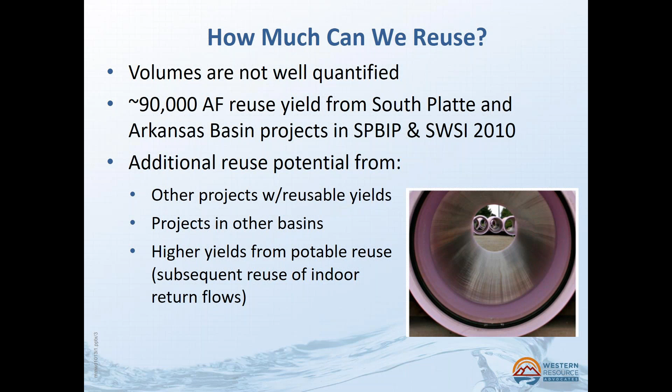And so I wanted to quickly define what we're talking about when we say reuse, because there are different definitions depending on what the context is. There's a lot of de facto reuse, we call it. That happens all the time when a community or an irrigator, their return flows get back to a stream and someone downstream picks them up and uses that.

But today what we're talking about is where one entity, usually a municipal water provider, reuses their own water supplies that are legally reusable, and they may use it themselves, or they may lease it or otherwise share it with someone else. If you think about the WISE project, for example, that's Aurora and Denver Water sharing their reusable supplies with South Metro communities.

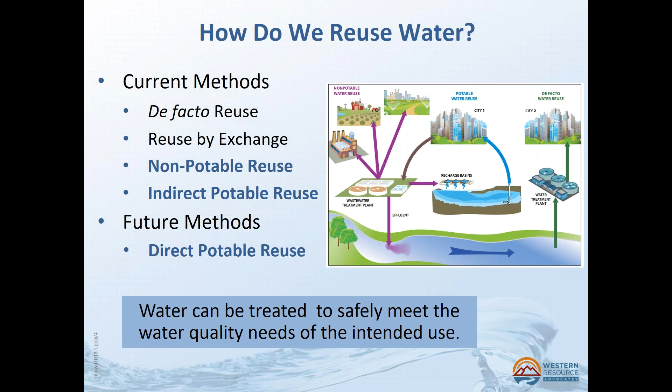And it's also upfront important to acknowledge that in Colorado, only certain types of water can legally be reused, so it isn't something that all communities can do. That said, many Front Range communities, where we're seeing a lot of Colorado's growth, do have at least some reusable supplies, and some communities have a lot of reusable supplies.

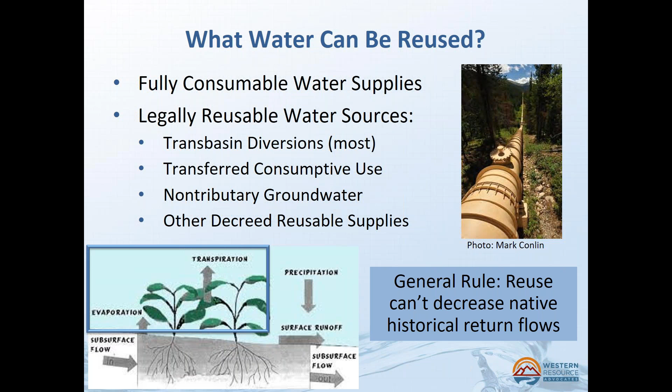And the general high-level rule when it comes to what water can legally be reused is that you can't decrease historical return flows from native supplies because someone downstream was depending on those. So that means the water that can be legally reused includes most, but not all, transbasin diversions, transferred consumptive use, non-tributary groundwater, and then also some of the more recent water decrees will have reuse specified in the decree, and so if that's the case, that water can also be reused.

And so we've been reusing water in Colorado since the 1950s. Most reuse projects in Colorado are non-potable. That means the recycled water isn't treated to drinking water standards. Most of that is currently used for outdoor irrigation. And if you think about that, that's a big limitation because it's limited seasonally. You can't do that all year round. And so that results in limited volumes of reuse.

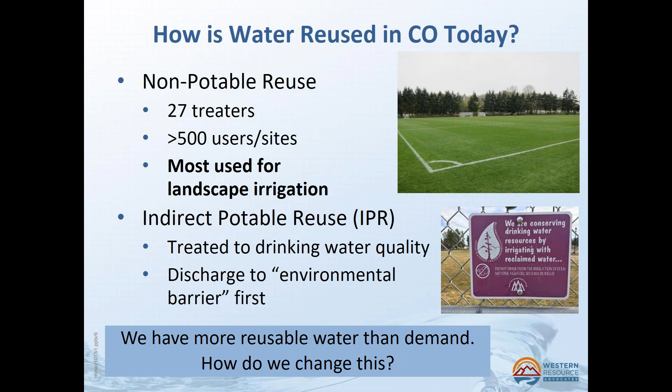We also do currently have what's called indirect potable reuse, and that's where water is released to what we call an environmental barrier, a stream or another water body, before it's recaptured, treated, and reused by an entity. And Aurora's Prairie Waters project is the most well-known, I believe, in our state. That project really was groundbreaking, and it has helped pave the way for other utilities to think seriously about potable reuse. So a big issue that we have is we have more reusable water supplies than we currently have demand for that water. So what can we be doing to change this?

So I'm going to break this into non-potable and potable. On the non-potable front, there's a lot of progress being made to increase the ways that we can use recycled water that's not treated to drinking water standards. Colorado's Water Quality Regulation 84 for reclaimed water specifies how non-potable water can be used. Right now in Colorado, there are 11 uses approved, and those include things like landscape irrigation, certain industrial and commercial uses, fire protection, non-food crop irrigation.

Last year was a big legislative session for reuse. There were several new uses that were legislated, and that's been followed up by, in 2018, a water quality rulemaking that added toilet and urinal flushing and also localized reuse systems, and I think Damian's going to talk more about that. And we're also currently in the midst of another water quality process that would add some other uses, and those are industrial hemp, commercial, and non-commercial food crops. So as we increase the ways that water can be recycled and reused, hopefully there's going to be more demand for that water.

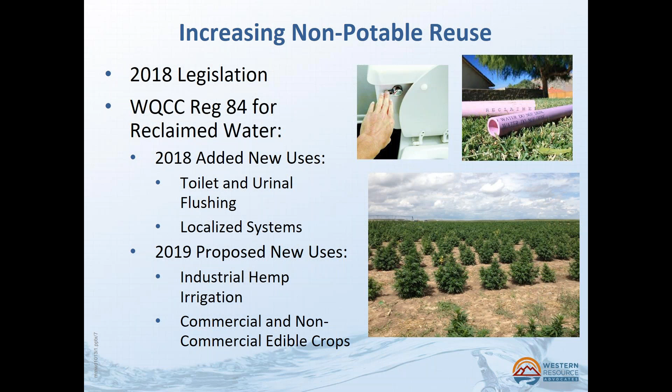At the same time, we also want to increase opportunities for potable reuse. So that's when we are now treating this recycled water to drinking water standards. And there are a lot of reasons that there is interest in that. I just put a few of the benefits down here, and I think Mark's going to talk about some of the drivers that are specific to Castle Rock. But a big one is increased yield. You can potentially almost meet double the demand with the same initial volume of water through potable reuse, because you can keep reusing those indoor return flows until they're fully consumed.

And another big benefit to potable versus non-potable reuse is you don't need a whole separate set of delivery infrastructure, which is really expensive to install and maintain. And it can also limit opportunities if a recycled non-potable system doesn't reach an area that you want to serve. With potable reuse, you're not limited to any specific use. You don't run into those seasonal limitations. The water is distributed through your existing system, so it can be used anytime, anywhere, for anything. And so these and some other benefits are what are driving utilities to take a serious look at potable reuse.

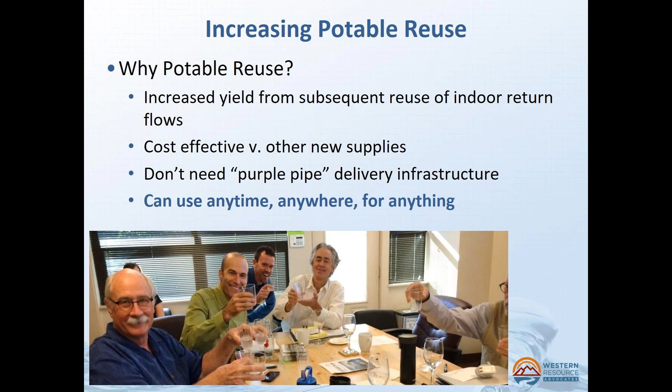So I already talked about Aurora's Prairie Waters. That's that indirect potable reuse where the water is first discharged to a stream. So communities can do that now. But what if a community wants to keep that water in their system? And there are some reasons to do that. If you think about once the water's discharged to a stream, if someone wants to capture it, that needs to be pumped back up. So that's a cost that could be avoided if you just keep it within your system.

And also, as water travels downstream, oftentimes there may be transit losses that accrue, so you're losing some of your supply. And then another reason is that some communities are really treating their effluent to a very high quality, and in some cases it can actually get degraded when it hits the stream, or that quality is not as consistent as it is coming out as effluent. So there are benefits to grabbing that water.

And these are just some of the things that are driving utility interest in direct potable reuse. And so that's where instead of discharging it to a stream, you just keep it in your system. The water's purified using multiple and advanced treatment processes. Often it's blended with other water supplies, and that results in a safe drinking water supply.

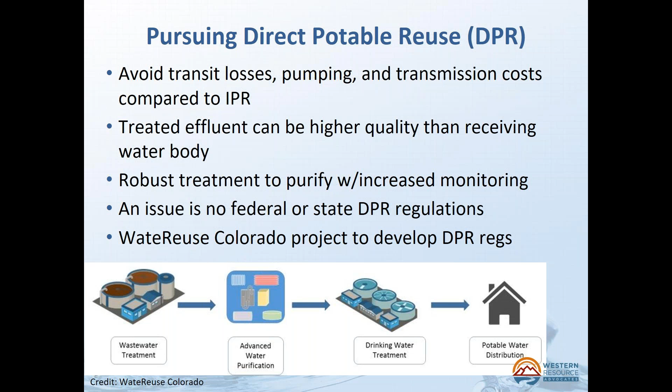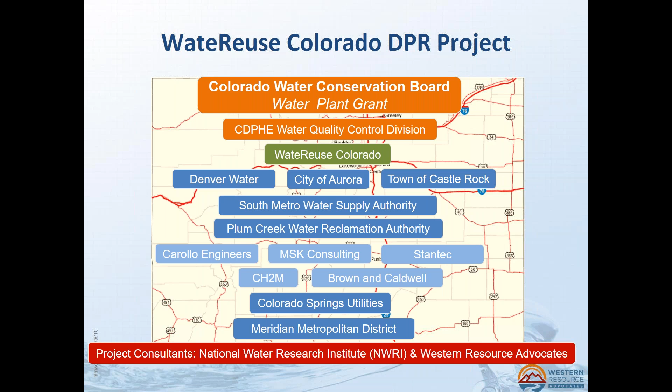And what Water Reuse Colorado is doing is they've hired the National Water Research Institute, and they run similar projects around the U.S. There is a panel of Colorado and national experts that have been hired, and they're working very closely with Colorado stakeholders and our state regulators to develop a proposed framework for DPR regulations. That project's ongoing. It should wrap up by the end of this year, and then we're hoping that we can kick off a rulemaking for those new regulations in 2020 or 2021.

And if implemented, that regulatory framework will provide water treaters with the certainty they need so that they can evaluate indirect potable reuse and direct potable reuse equally amongst other water supply options. One outstanding issue I want to identify is that for these rulemakings, and as reuse increases and there are more projects coming online, our state regulating agency, the Water Quality Control Division, is going to need more staff to regulate reuse. And so securing those resources is really going to be critical to Colorado's ability to increase reuse, and that is something that we need to be working on.

And so here's that headwaters issue again. As we work to increase reuse as one of the ways to ensure we have sufficient water supplies now and into the future, there is still a lot of work to be done, but we're definitely on the right track and we're making really good progress. One thing I just wanted to mention as I wrap up, and this is my last slide, is that we're seeing increased interest in and support of reuse, not just among water utilities, but also among the public. And that's really important because public acceptance can make or break a reuse project. And so everyone listening in today, hopefully you can help with that.

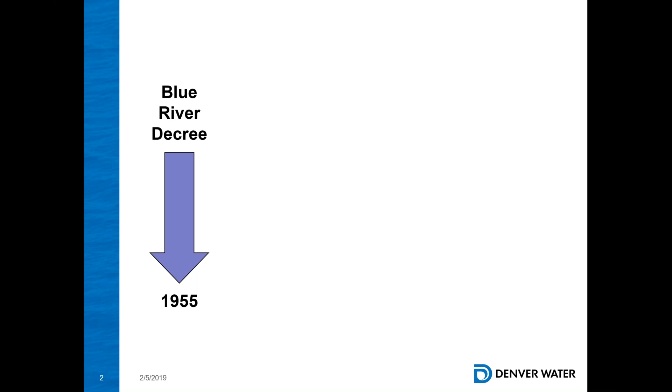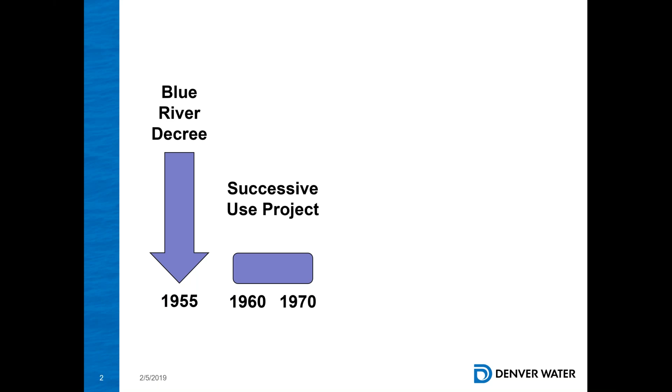So once you have that water supply and the right to that, we decided, okay, how can we use this? Are there technologies out there that are compatible with treated wastewater that we can make use of? So in the 60s and 70s, we took a look at those treatment technologies and found that there were quite a few that were compatible with treated wastewater. So the next step was to take a look at water quality we could produce. And in the 80s and 90s, we entered into the Potable Reuse demonstration project, where we took a number of these technologies that you'll find in potable reuse applications today in various combinations and produced water, and then ran some of that water through toxicology testing with lab rats and a whole host of water quality analyses. Really a landmark study that's cited even today.

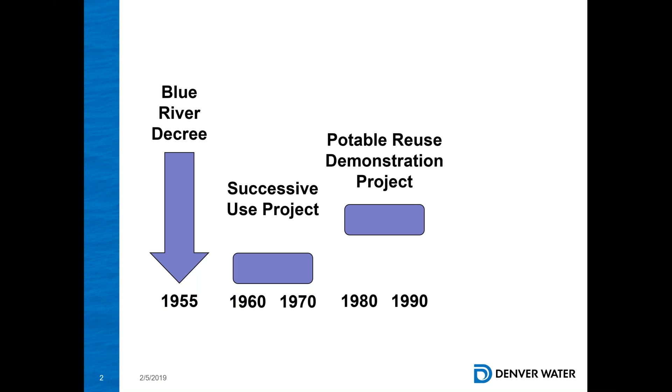And so while we found that you can take treated wastewater and treat it to virtually any water quality, including potable and beyond, the regulatory framework to provide some certainty was not there at that time. And then also the public. We didn't feel that the public was quite ready for this transition. And so rather than go down the potable reuse path, we decided to commission our non-potable recycling plant. That was in 2004. It's a 30 MGD plant that is expandable up to 45 MGD, uses some biologically active filtration and other interesting technologies to produce non-potable water.

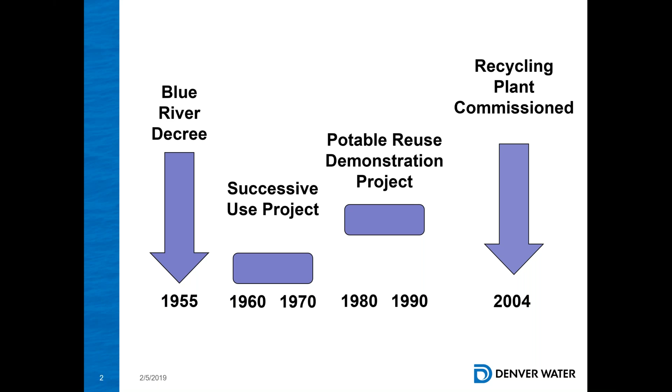So the water rights and agreements associated with that, both the Blue River Decree and subsequent agreements, are a big driver for reusing water, but it's hardly the only driver. Another huge driver is taking demands off the potable water system. You can stretch your potable water system and the supply further if you supply some of those demands through a non-potable system. The treatment, if you don't need to treat up to potable water standards, it costs more to do so. And so treating up to the water quality that's needed for the end use makes a lot of sense and can save money in chemicals and salt inputs into that system.

It's a reliable water supply. We actually have more trans-basin water, so more reusable supply during a drought year. We're actually bringing more water over the Continental Divide, and so there are some reliability benefits to that system. Nutrients, among other parameters, are actually beneficial to the end uses being served, while those same parameters can be pollutants when they're discharged to a water of the state. So you can utilize existing nutrients and reduce pollution to our waters with the same rock.

So when you compare a recycling system or a reuse system or a reclaimed water system, they all mean the same in the context here today. When you compare those types of systems to building a new dam or acquiring new water rights, it is comparable financially and otherwise, and so it does make a lot of sense as we're learning with a couple of the dams we've tried to build, whether it's Two Forks or Gross expansion. Those are difficult and costly, and so an alternative like this makes a lot of sense. It's also a lower cost to the users on the other end of it. They save about 75% of the costs associated with potable water, so it works for both parties.

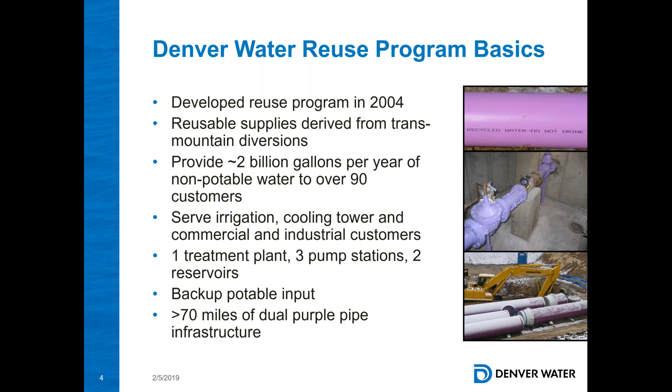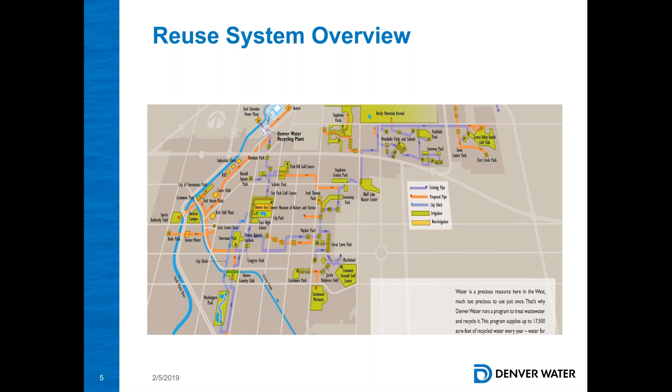So as you expand your infrastructure, that next incremental demand gets more and more expensive. And so it's important to identify the right customers, but we also want to identify additional uses that recycled water can be put towards. So the original Regulation 84, which is the state regulation that governs recycled water, reclaimed water as it's known in the regulation, came about in 2000, addressed basic irrigation.

In 2004, industrial and commercial uses were added to that. 2005, we expanded the irrigation to even include single-family homes. In 2013, laundries and car washes were added to the list of approved uses, and then last year toilet flushing was added to that list, and localized systems, which are smaller systems that take in wastewater from a campus or a district scale development and utilize it to produce reclaimed water for various uses.

But those smaller systems have just a little different operating paradigm and different requirements, whether it's design, the treatment employed, how it's operated, how it's monitored. All those are a little different. So we wanted to distinguish between classical centralized systems and these new localized systems that we're seeing implemented throughout the country and hopefully in Colorado soon.

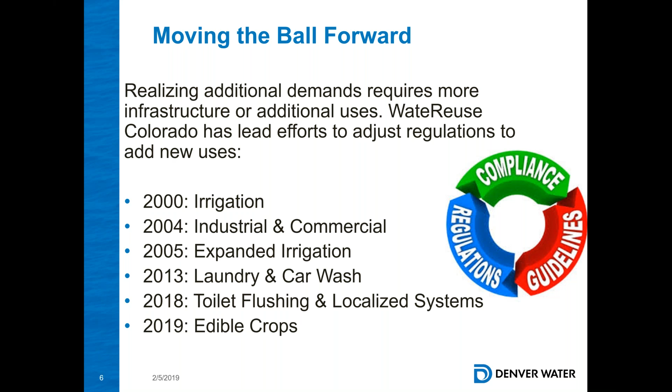This year and into next year, we'll be looking at edible crops, including marijuana, hemp, and commercial and non-commercial edible crops. So we're working with the Colorado Department of Public Health and Environment on what that looks like, the treatment that needs to be employed, the management practices that make sense, and what types of water can be put towards those. So all of this has been driven by various utilities who have drivers of their own, but also Water Reuse Colorado, who as a trade organization for reuse has been a real driver and provides support, both financial and in terms of time and effort and expertise to these efforts. So big props to WRCO.

Another initiative you'll see coming out is One Water, and that's a ubiquitous buzz term that you'll see every utility using, and it means different things to different utilities in different parts of the country. But the basics of it are you want to take every drop and make the most effective and efficient use of that water. So we're taking various water qualities, various sources, whether that be rainwater capture or black water, gray water, all those things play into this, deciding exactly what levels of treatment are needed and what management practices are needed to provide that water for various uses.

Colorado Department of Public Health and Environment is interested in this approach and having a more comprehensive, holistic regulation that takes all those uses and sources, matches them up with appropriate treatment technologies and management practices to protect public health. So we're working with them, and they have some funds set aside for the near future to take a closer look at what that looks like, and hopefully one of Denver Water's projects, which is our administration building.

We're scraping our campus and building our new administration building, which will incorporate some rainwater harvesting and black water, so a sewage collection system for the building, and then a treatment plant to treat it up to Regulation 84 standards, the reclaimed water standards, and then provide that for toilet flushing and landscape irrigation. So hopefully we can blaze the trail a little bit and work out the kinks in our system, so that our customers and customers of other municipalities can take that same road when this is a little more established. So looking forward to that.

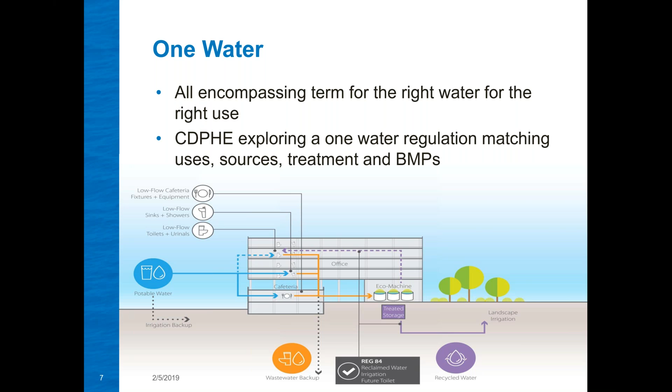As Laura mentioned, potable reuse is also a really important initiative that'll be coming down the road. As she mentioned, public acceptance is crucial. You can't get a project off the ground unless you have public support, and it takes a lot of groundwork being laid to get to that point. And in that effort, part of that for Denver Water was partnering with Water Reuse Colorado, the Colorado Water Conservation Board, and a number of consultants like Carollo and other vendors who came together to establish a demonstration facility, which was essentially a pilot, bringing potable reuse treatment to bear.

One important aspect was it was not using reverse osmosis. Reverse osmosis is a great technology, but it takes everything out of the water, including all the salts that accumulate in any wastewater process. And then when you take them out, you need to do something with that.

And there's a number of methods for disposal of that, but they're all expensive and difficult from a permitting standpoint. And so finding a non-RO treatment, which we utilized in this project, biological activated filtration, was important to make it viable for inland locations. And so demonstrating that was important.

We produced water in batches, provided that water for testing to make sure it met drinking water standards, and then provided that water to tours for tastings. And then we also made beer with that water through one of our partners, Declaration Brewing. That's been done before, but this next step with the wine production has not been done.

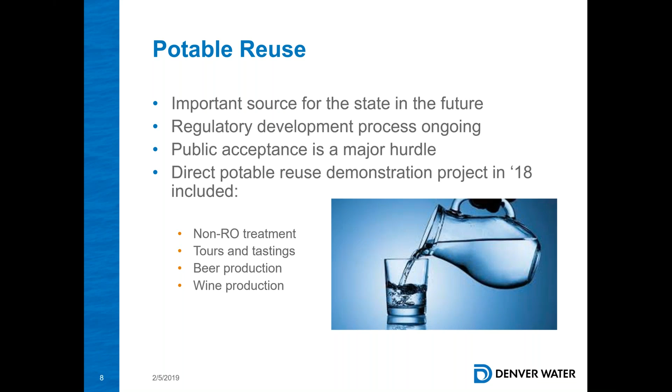And so that's an important aspect, and we're hoping that Denver Water, while we're not in a position to be needing this in the near future, we know that at some point we probably will, and we want to make sure that it's a viable option, not just for us, but for the state as a whole, as a number of utilities are actually looking at this on a shorter term planning horizon. So I will turn that over for Mark to talk about his projects in Castle Rock.

All right, thanks, Damian. So Mark, you should be the presenter now, and everyone else will finally hear from Mark Marlowe, Director of Utilities for Castle Rock Water. Mark has been leading the charge to secure a long-term renewable water supply for Castle Rock, so we'll hear what's going on with him and why it matters for a town like Castle Rock's future.

Good afternoon, Caitlin. Can you hear me okay? Yeah, you sound great. Okay, good. All right. Well, this is my first webinar as a presenter. I have to admit it's a little weird for me not to be able to see the folks I'm talking to. So if I sound a little awkward, it's because I feel a little awkward doing it this way.

So reuse has been talked about as an important long-term solution for Castle Rock since at least 1982. And in fact, dual piping systems, that's the purple pipe, were put in place in some areas for non-potable reuse back in the late 80s. Unfortunately, until this point, those pipes were not put into actual use, and towns and cities downstream of Castle Rock have been doing de facto reuse on our treated wastewater.

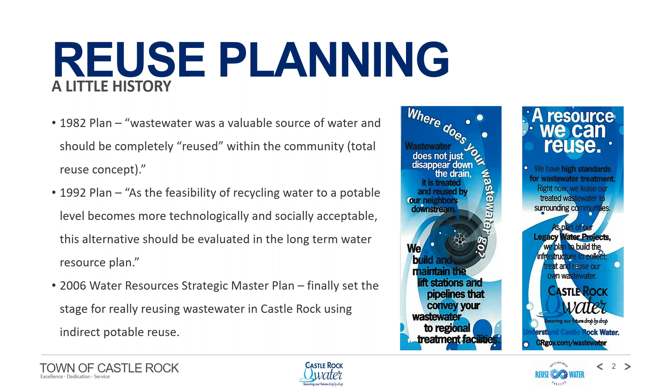So Laura and Damian talked about this. One of the reasons reuse makes so much sense for Castle Rock is that most of our water rights can be reused to extinction. And of course, this is a critical issue for reuse to become more common in Colorado. And one of the first questions folks need to ask themselves if they're going to do a reuse project is, do their water rights allow them to reuse the water? And of course, for us, the answer is yes. For some others in Colorado, that may not be the case.

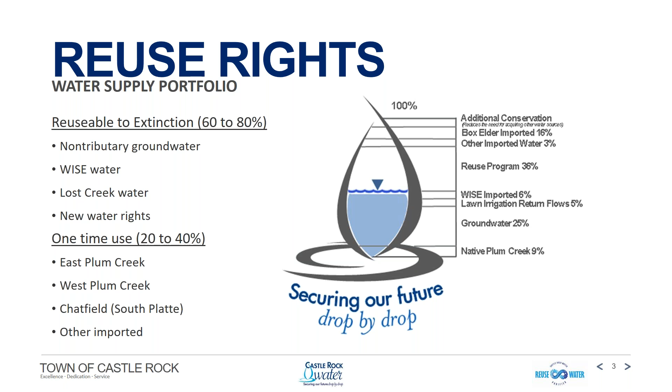You can see our long-term water sources on the right. Reuse is a huge chunk. Ultimately, the Wise water is also reuse water, and this is the water we get from Aurora and Denver. So if you combine that with our internal reuse program, we could have a supply over 40% reuse in the future. So that's pretty exciting for us.

And then this spring, we are actually finally connecting to some of that old non-potable reuse pipe that was put in the ground back in the late 80s. And we're going to connect the pipeline from that to our Red Hawk Golf Course facility. So we'll finally be doing non-potable reuse, hopefully later this summer after all these years. So it only took about 3 or 4 decades, but that's okay.

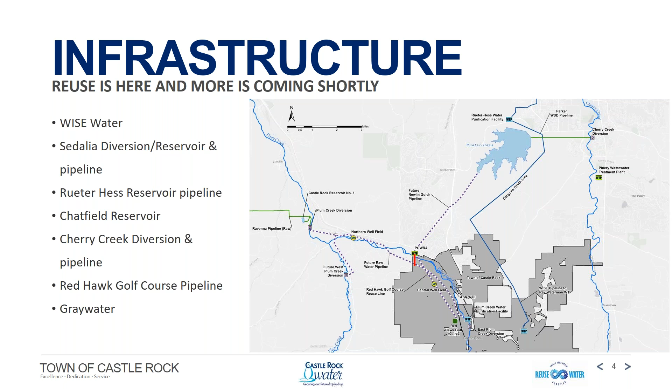As part of our indirect potable reuse project, we're upgrading our Plum Creek water purification facility with additional treatment processes to treat for contaminants of emerging concern and all the other fun stuff that's not regulated and not necessarily removed in the treatment at the wastewater treatment plant. One of our key strategic moves was to design the upgrades to be capable of treating direct potable reuse water so that we would be prepared to make a seamless transition to direct potable reuse in the future. We also, however, didn't want to have to deal with the brine from reverse osmosis.

So below you can see here in the slide the treatment process we plan to put in place. The new processes we'll be adding include ozone, biologically active filters, biologically active carbon filters, ozone disinfection, granular activated carbon polishing, and UV disinfection. And this, of course, will supplement our existing aeration, flocculation, sedimentation, and membrane filtration process. Of course, there's no guarantee that processes we put in place will meet future DPR regulations in Colorado when and if they're put in place. Obviously, we do believe this will get us very close to meeting those, however, and we'll certainly take any additional steps when necessary.

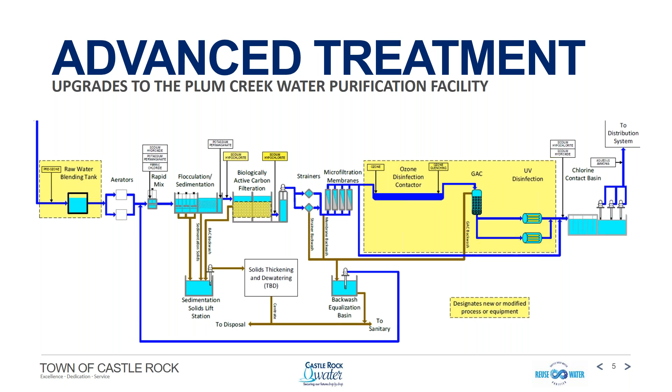Finally, we will have to pay attention to total dissolved solids, which of course are not necessarily removed by the treatment process we're putting in place. Most of the time, our studies show that we'll be fine because we'll be using blending to ensure that we don't have an issue in the natural stream and at the plant. However, we have determined in snow season we might have some problems, as the use of magnesium chloride on our streets can cause spikes in the total dissolved solids in the creek. So that's something we'll have to monitor going forward.

Although others have proven similar treatment processes to ones we're putting in place, we wanted to make sure that this specific treatment train would work for us on our water. And so we did bench scale testing. And I would recommend anyone planning an IPR or DPR project to do this. It provides a great deal of data for design, of course. It builds confidence with your team. And then, of course, it gives you the proof you can use with your customers that shows that it works.

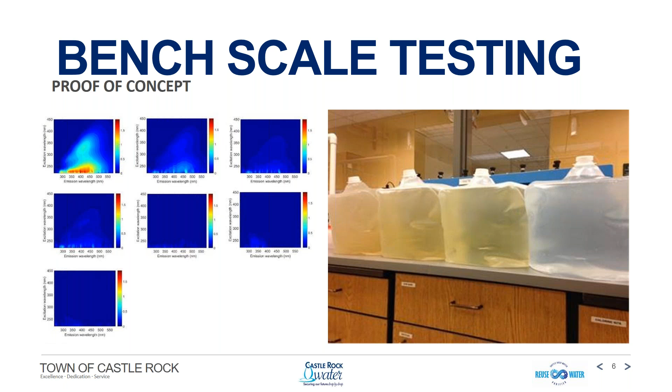And in the picture, you can see the water gets better going to the right. And I like this excitation emission matrix or heat map that they use to determine what's left in the water. And it's kind of cool because up in the top left, you can see the untreated water, and then down in the bottom left, you can see the treated water, which gets very blue, which is clean. And we removed almost all of the contaminants of emerging concern and other stuff through the bench scale testing.

So even though we did bench scale testing, we also wanted to pilot test some of the more complex treatment processes. So we brought in a pilot treatment unit to test the biologically active carbon filters and the ozone treatment. We ran that pilot test for about 6 months, and we did something in that I also recommend for anybody that's considering a reuse project like this.

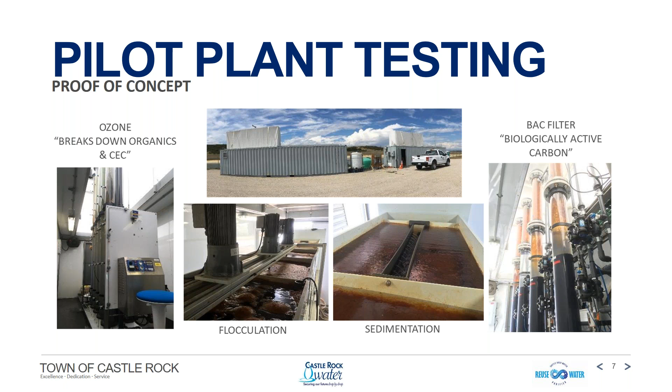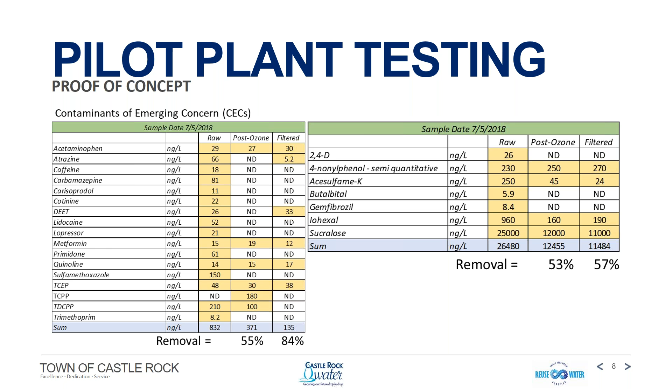We had our operators actually run the pilot project, and this gave them a ton of experience with the process, which is not a common process for these guys, and then built confidence in the treatment as well for them. And this just shows you an example of some of the results from the pilot plant testing. We had excellent removal, and the results through these first few processes were consistent with what we were seeing in the bench scale testing, which obviously gives us more confidence in what we're doing.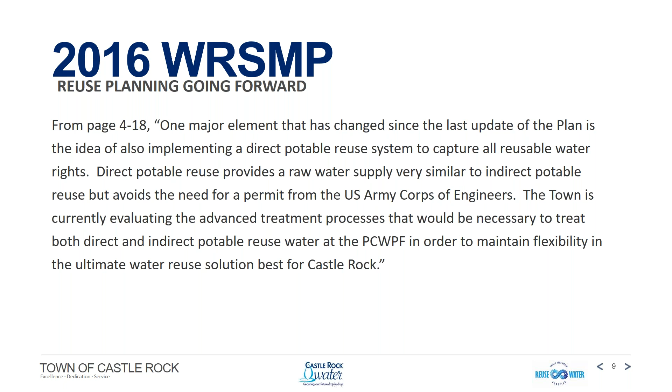I do want to talk just a little bit about going forward. So I mentioned we're interested in direct potable reuse, and we've been planning for that. We've also started to message that to our customers and stakeholders. We've put that into our Water Resources Strategic Master Plan back in 2016, which was approved by our council in early 2017. And we're already talking in the community about the fact that we're going to eventually want to go to direct potable reuse. In fact, I'm presenting at our Rotary Club tomorrow, and I will be talking about it then. So hopefully I don't get run out of the club.

Outreach, of course, is a huge part of this process, and it's a long-term process. And I think one of the reasons we're in very good shape locally is that we started early and we've continued. So we've been messaging reuse for over a decade. And you can see we've been doing all kinds of things relative to that messaging in the list of outreach here. I do want to thank Denver Water.

We are hosting an open house on reuse actually on February 23rd, and Denver Water donated some of that great wine that they made with some of their reuse water that was produced in their pilot test over the summer, which used a very similar process to what we're going to be using in our project. So it's going to be a great chance for us to let our customers see what wine tastes like made with direct potable reuse water.

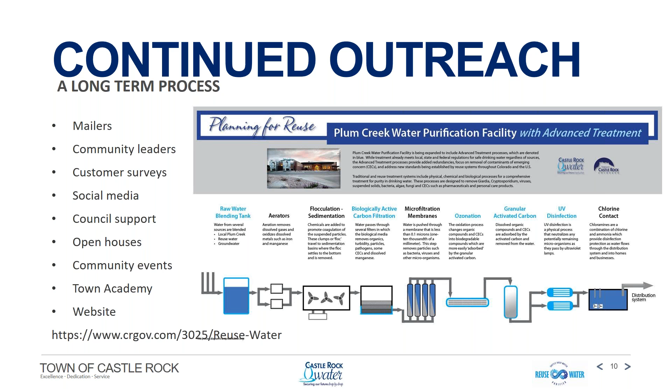I think these are some of the same reasons that most of the South Metro Water Supply Authority members are already doing some reuse or moving towards reuse. I think long-term estimates are that as much as 28% of the South Metro Water Supply Authority's water supply for the members will be from reuse, which is pretty cool. I think South Metro members will comprise a large amount of the future 58,000 acre foot that the state's water plan estimates will be reused in the South Platte Basin. And of course, as Laura mentioned, I'm sure that can expand as well.